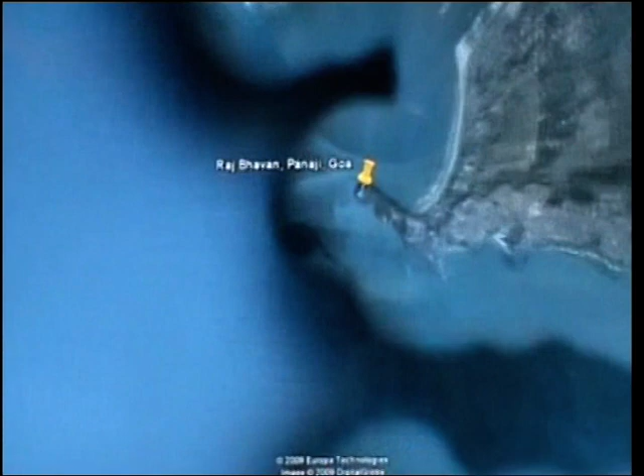Goa was the first part of India that was colonized by Europeans and also the last to be liberated. The Portuguese set up a base in Goa in their quest to control the spice trade. When India became independent in 1947, Goa remained under Portuguese control.

Under Indian rule, Goa has become an autonomous, federally administered territory. Goa was admitted to Indian statehood in 1987. The 400-year-old Portuguese time construction of Raj Bhavan Palace, the official residence of His Excellency, the Governor of Goa, is situated atop the Cabo Promontory at the confluence of rivers Mandovi and Zuari.

The northwestern and western slope of Cabo Hill, adjacent to the Raj Bhavan complex, has been experiencing a continuous process of settlement and distress for decades. As a result, cracks have developed on the pavements, the floor of the veranda, and intercepting the western and northwestern part of the building of the historic palace and Raj Bhavan.

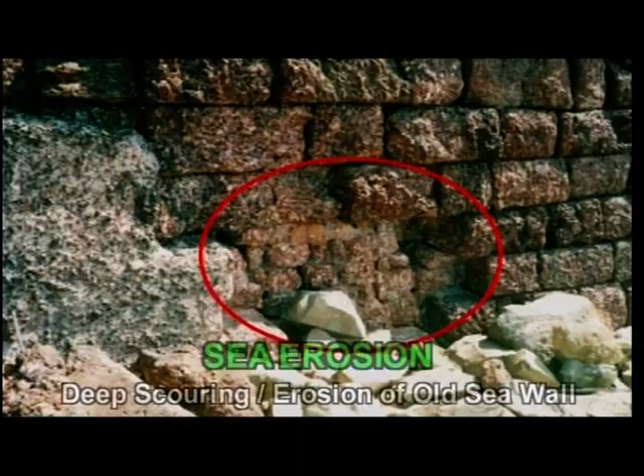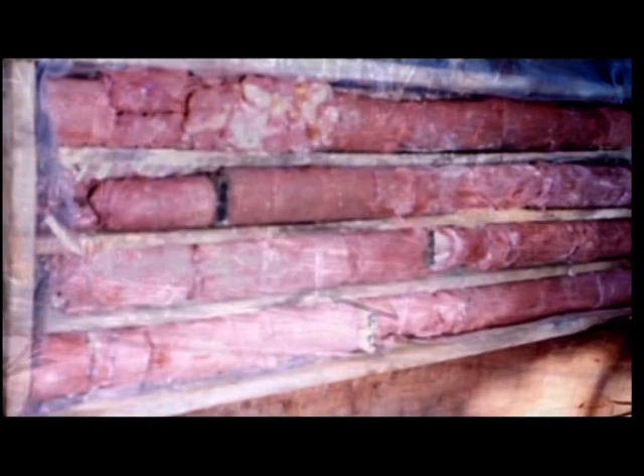The Water Resource Department of the Government of Goa had entrusted the work of analyzing the unstable slope at Cabo Raj Niwas to the Geological Survey of India. The Geological Survey of India along with the staff took up the work of investigation of the unstable hills in the year 2003 and conducted the investigation by drilling of bore wells, collecting the samples of the soil and also knowing the texture and type of slopes available at the site.

We are standing at the backdrop of the seat of His Excellency, the Governor of Goa, and this is about 100 meters away from the seashore, and it's about 40 meters above the sea level. Now this area has been under threat from the natural distress, the movement of the mass down below, and this is moving on towards the sea.

And this movement of the mass towards the sea has caused a number of manifestations on the ground, and see here, a number of cracks have developed, and these cracks have started from there and have entered into the building and far into the interior of the building.

So with this problem in hand, the Governor of Goa requested Geological Survey of India to take up this investigation. At their instance and also on the request of the WRD, Government of Goa, Geological Survey of India took the investigation in hand. Yes, this investigation was taken up in the month of June 2003, and Mr. Panduranga, Mr. Dharuman and myself, we were all involved in that.

This team of experts came over here, and first of all we mapped all those cracks and the surface manifestations which were existing and what you have seen on the ground. We could identify 3 active slide zones over here, zone number 1, zone number 2 and zone number 3, and where we are standing is zone number 1, where the most sliding is taking place, and very highly sensitive distress has taken place in this area.

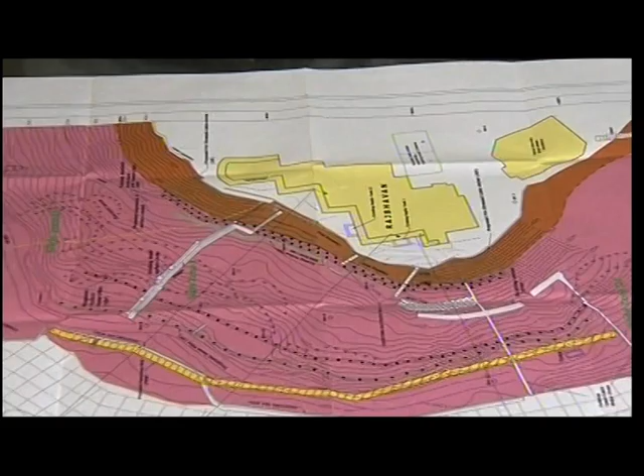Later on, after getting a good impression from the Governor of Goa, we took up our second phase of investigation, which was thoroughly a package of investigation. It is a full package. The package includes geotechnical mapping over here, and also the ground survey, which gives the contours and everything. That's the topo mapping.

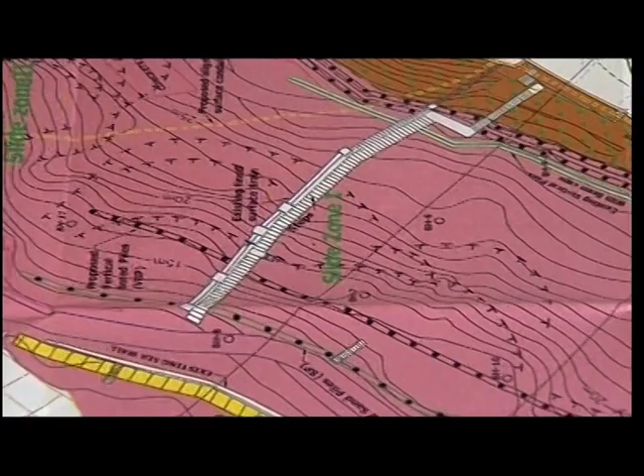Then geophysical surveying, geophysical mapping, just to know the bedrock profile and also the variations in the soil composition. Then subsurface drilling, just to know the different lithological changes beneath the surface, and also to know the groundwater level down below, and also to know the extent and configuration of the slip circle we have identified.

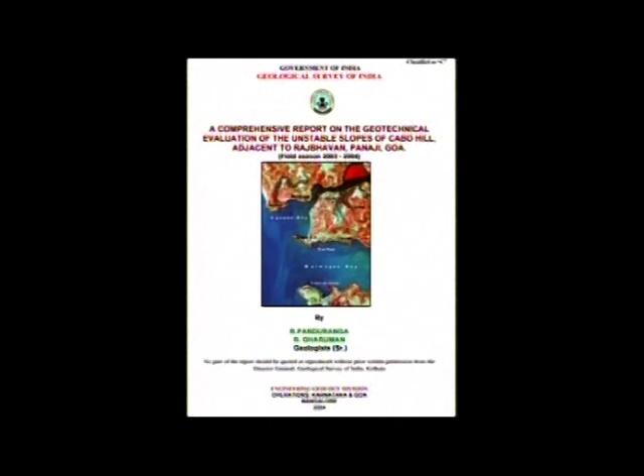Based on the recommendations of the GSI, the department has taken up the implementation of the work through ITD Cementation India Limited, who are the experts in such type of works. Total cost of the work was to the tune of 617 lakhs.

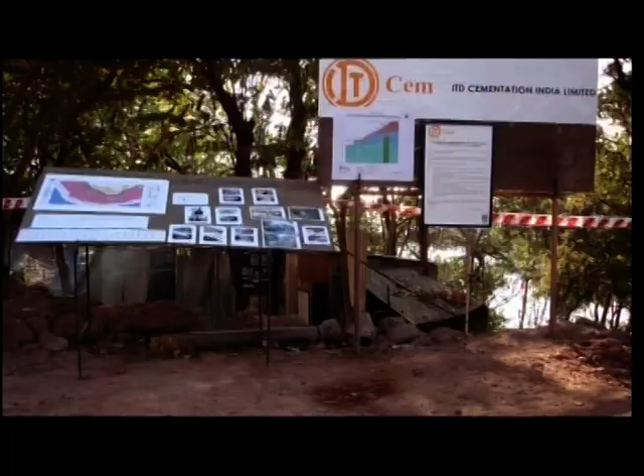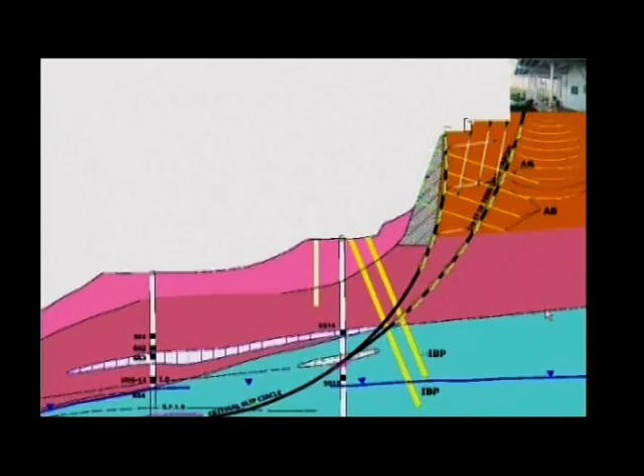Major components of the work are stabilization of the upper slope by pre-stressed cable anchors, which are anchored into the hard strata with a stress up to 25 to 30 tons, and the middle slope by providing vertical RCC piles with RCC cap for a length of 240 meters.

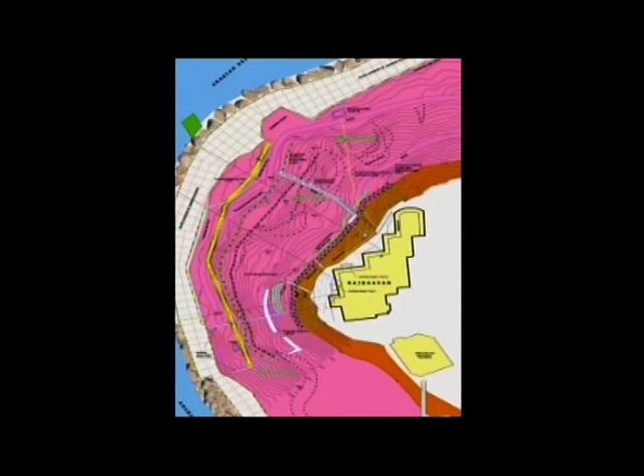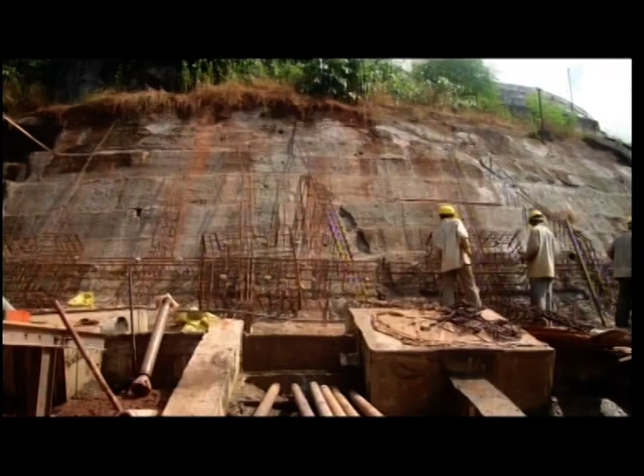The lower slopes are stabilized by providing concrete walls to intercept the slip circle. Also, the toe of the hill is protected by providing concrete blocks to avoid direct effect from the sea waves. The work was executed by the department under the guidance and supervision of the GSI Bangalore, who were all along associated with the implementation of this project.

Our second phase of investigation was a total teamwork between Geological Survey of India and the WRD engineers, and they were thoroughly associated with us. While drilling, our aim was not just to see the configuration of the soil, but also to know the different physico-mechanical or engineering properties of the soil. So for that, we did in situ testing over there.

That in situ testing includes the determination of the N values by SPT test, collection of the undisturbed samples, collection of the disturbed samples, and taking all these samples to the laboratory to get them properly analyzed, importantly to collect the C and phi values, moisture content, density factor, everything which is essentially required to work out the stability parameters of this distressed slope.

Based on the analysis of the whole data collected, they have recommended the remedial measures to be taken up in order to stabilize the slopes such that the cracks and collapses which were occurring regularly do not occur henceforth. The remedial measures suggested by the GSI could be divided into 4 parts.

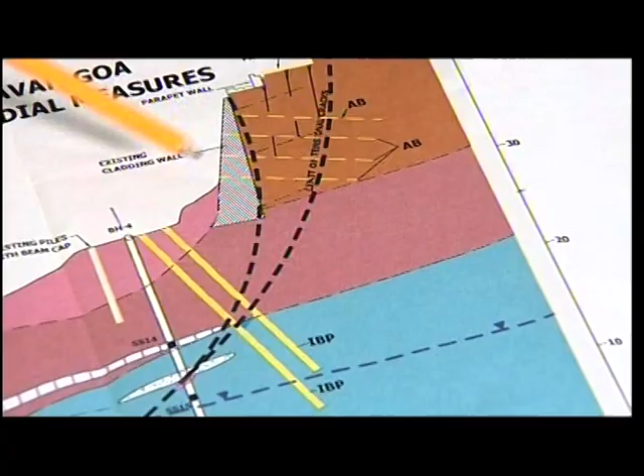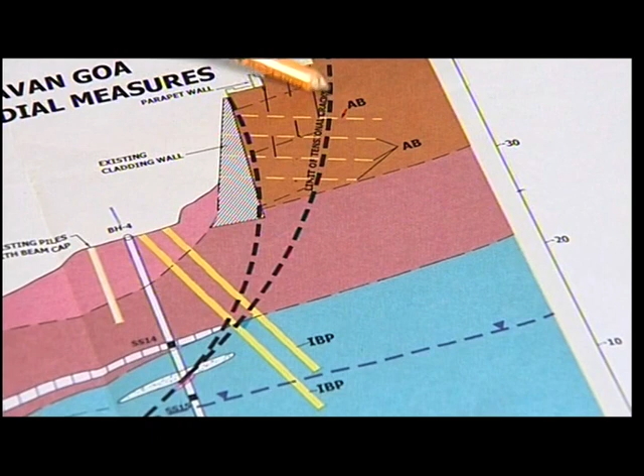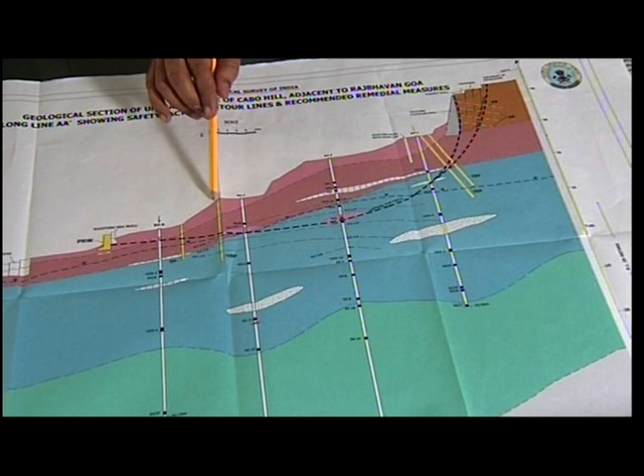This is the cladding wall which was there. These are the proposed anchor bores, this is the slip circle, and these are the inclined piles. From this point to this point is called the middle slope, and this is a slip circle. These are the factor of safety lines, 1.5 to 2.5, calculated on the mathematical model. And this is the vertical bore pile which has been put with a beam cap.

From this point to this point is called the lower part. This is the vertical bore pile which is there. This is the wall which is proposed to be constructed, which is well below the slip circle, and these are the sand piles which are proposed to be provided to relieve the pore pressures within this zone.

Further down, this is the sea, and these are the anchor blocks which are proposed to be provided to stop the erosion of the sea, such that the toe is also protected and all the materials are well within the slip circle. This is the toe part of the unstable slope of this Cabo Hill, and it's a crucial part where the slope forming material will be, and we suggested one retaining wall and a protection for the seashore.

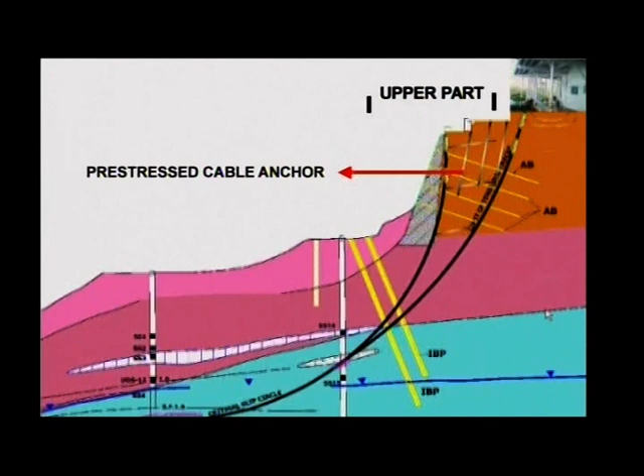In the upper slope area, they have suggested we should go in for grouting of the cladding wall and grouting of the disturbed zone to 4.5 meters, and also that a cable anchor should be drilled well into the hard surface available at the site at a depth of 17.2 to 22.5 meters. Based on these details, the department took up the detailed designing of the cable anchors, the piles and the pile caps.

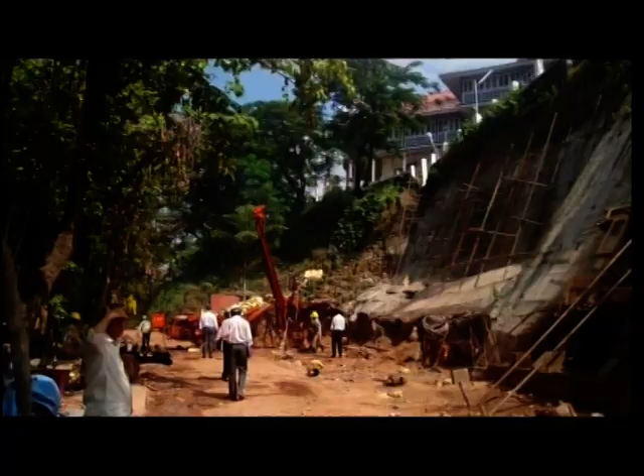First the department laid the base layer of the beam caps and then made a grid of columns and beams. The department did the designing and laying of the project and also worked out a method of how to tackle the situation, how to tackle the remedies so suggested.

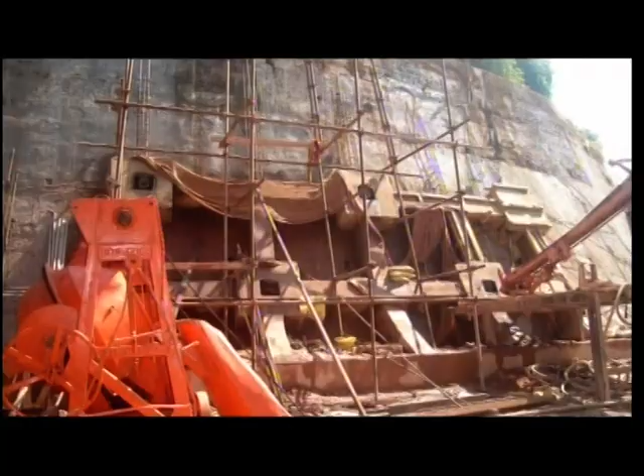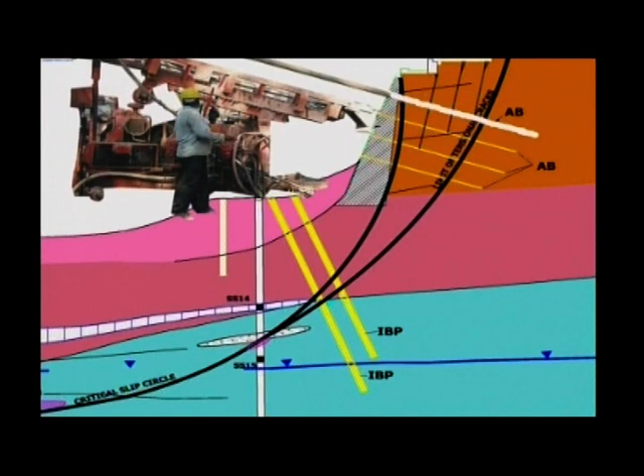First we proposed a grid of columns and beams at a spacing of 4 meters center to center to have four rows of cable anchors. Then we have 4 rows of cable anchors, one drilled at a depth of 22.5 meters, another at 20 meters, another at 17.5 meters and another at 15 meters deep into the duricrust.

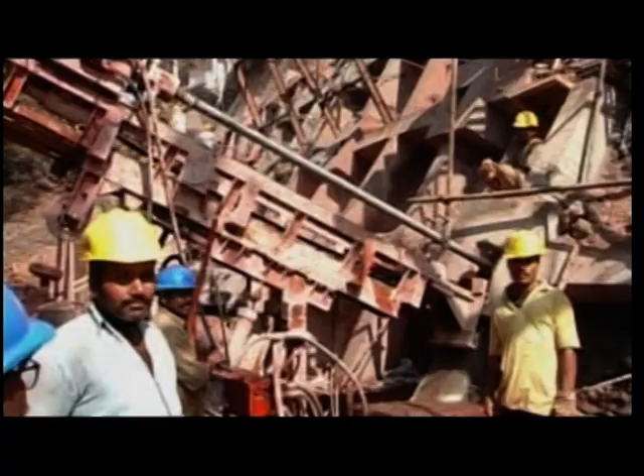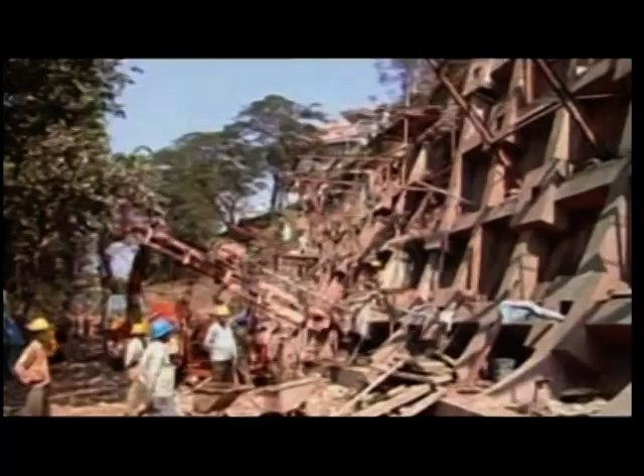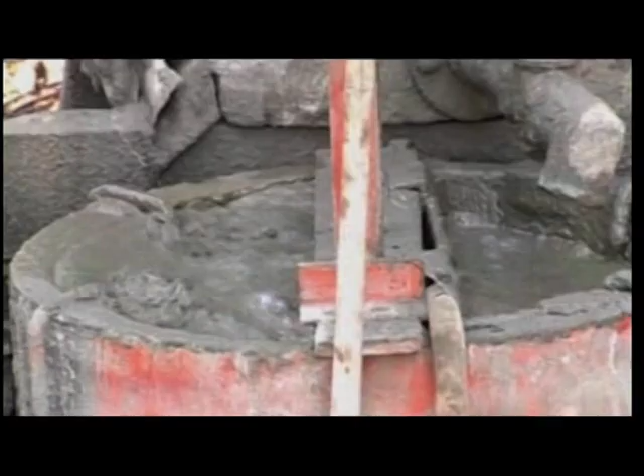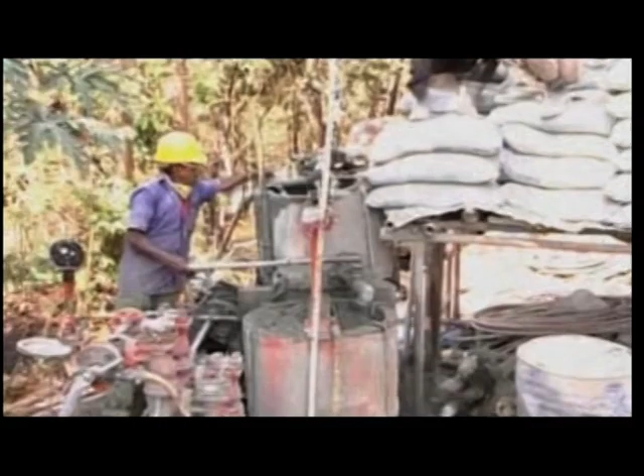ITD Cementation was awarded the work. They started the work. Initially we started grouting the cladding wall so that whatever fissures, gaps and cavities were there within the wall were consolidated, and also to have a proper joint between the concrete and the duricrust behind. Further, we did grouting up to 3 meters so that the disturbed soil due to distress over the years is consolidated and brought into proper shape, and also to improve the mechanical properties of the soil bearing.

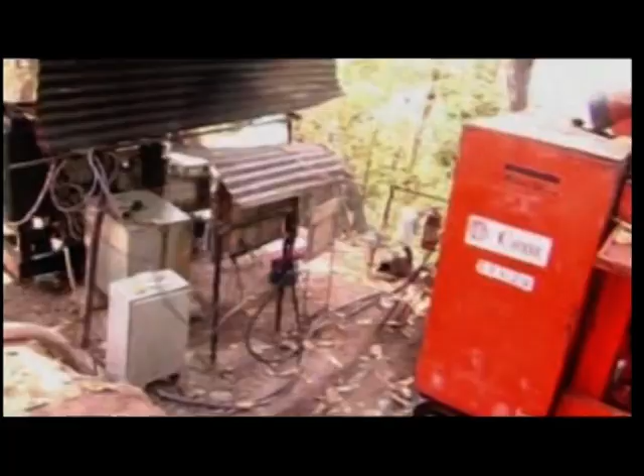And then we took a third grouting stage at 4.5 meters so that all the balance materials within the slip circle have been consolidated and the mechanical properties such as C and phi values are improved. After which we have taken core samples to find out how much depth the grout has travelled and what is the sample of the soil there, and analyzed it with the samples taken earlier before starting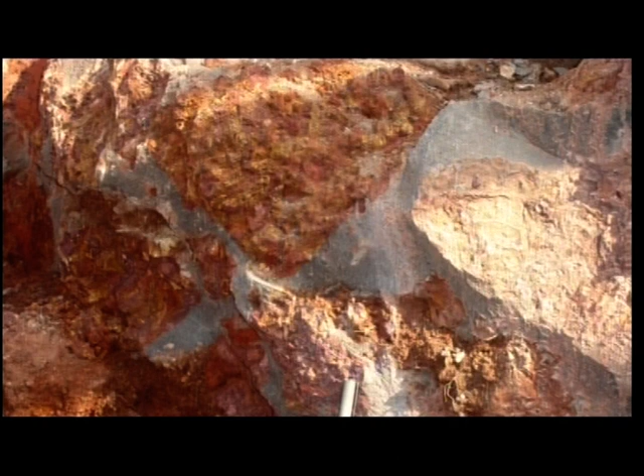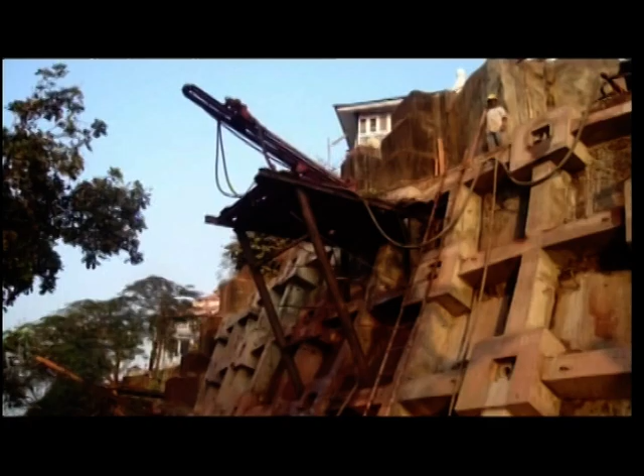the work. Once we confirmed that there is improvement of the mechanical properties of the soil, grouting was done at a pressure of 5 kg per centimeter square and the grout allowed to flow through and through the body of the duricrust until the point of refusal. Once we got the point of refusal, we leave the grout for 2-3 days, then again go for regrouting to see if any further grout is going in due to distress or drilling.

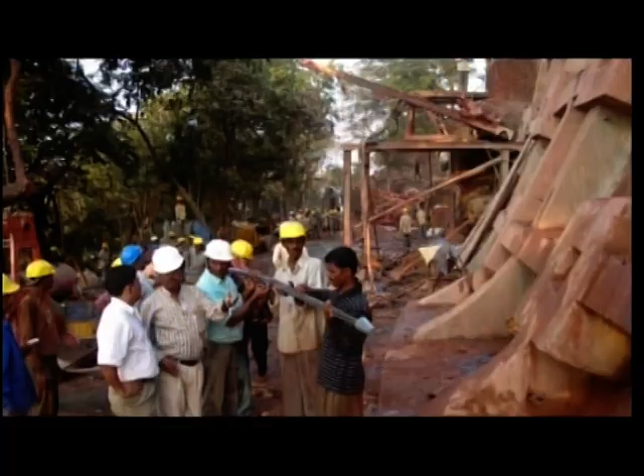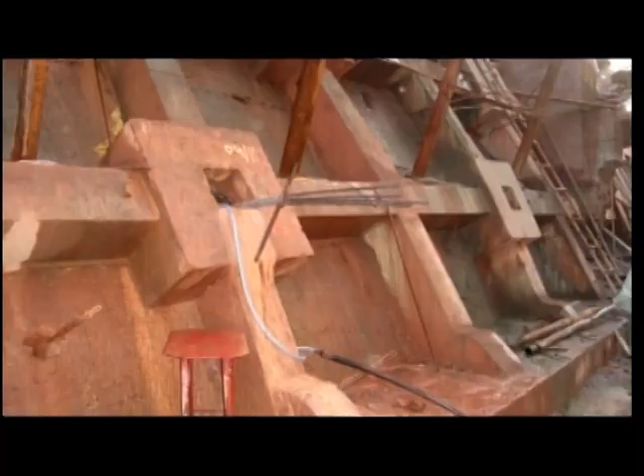Once it is confirmed, we go for a water tightness test, allowing the water to go under pressure and seeing the water loss. If the water loss is within the permissible limit of 5 Lugeons, then the bore is dried up and made ready for putting in the cable anchors. The cable anchors are prepared for lowering into the bore holes after the water test, and then the cable anchors are lowered, and the first 3 meters of the lower portion of the anchor is grouted and left for 28 days for the grout to gain strength.

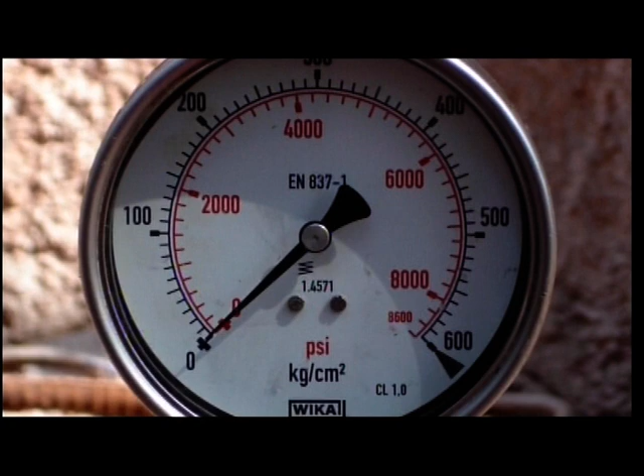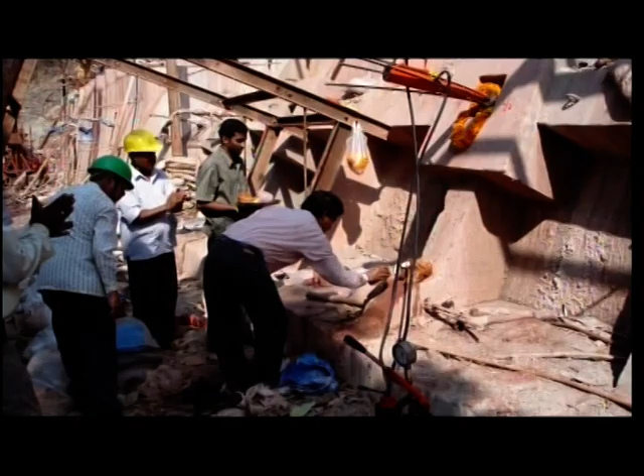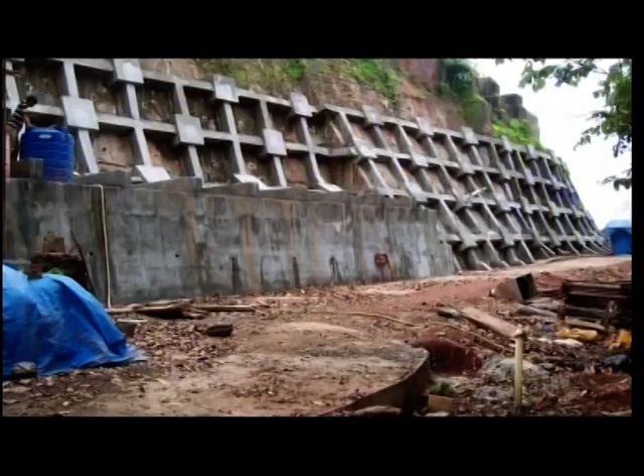After the required strength of the particular cable anchor has developed, the cable is slowly stressed to the design stress of 35 tons plus 10%, keeping a 10% stressing loss allowance. Then after stressing, the cable is locked over a stress plate and kept for 28 days to check the performance of the particular borehole. If there is a loss less than 10% of the stress put on the cable, then the cable is taken for final grouting.

During this process, we also keep several cable anchors ungrouted, called load cells, to check their performance over a period of a month or 2. This gives us the whole control over the methodology and the effectiveness of the grouting conducted. After doing all this process, now we are sure that the whole disturbed mass has been grouted properly and tied to the strong surface prepared a little away from the slip circle.

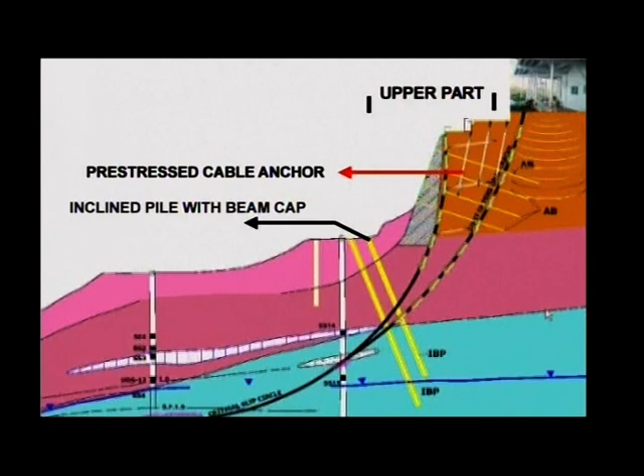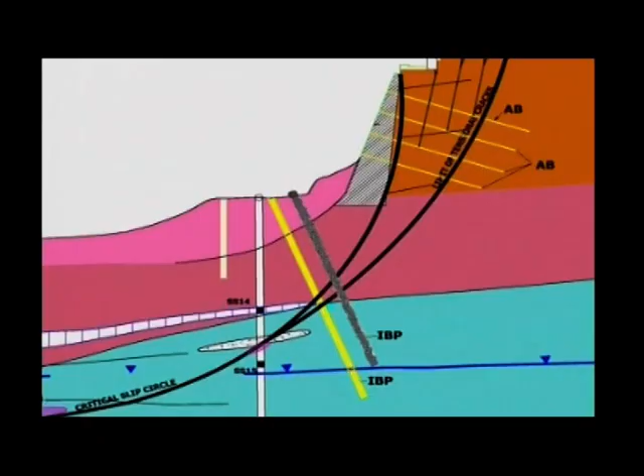With this, the upper slope was stabilized, and further down in the middle slope we have taken inclined piles of 15 degrees to the vertical all along the affected area to a depth of 20 meters. We have lowered MS pipes into the holes, then lowered a steel cage and then grouted those bores, which actually prop up the whole slipped or distressed area and also divide the slip circle into smaller segments such that the total mass slipping reduces.

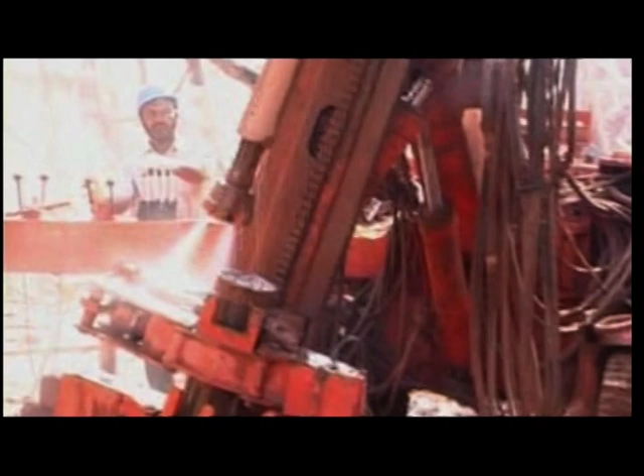And this is capped by an RCC beam, so that all the inclined anchors, which are at 2.5 meter center to center in a staggered way, act as one unit and have the strength to keep the whole mass intact.

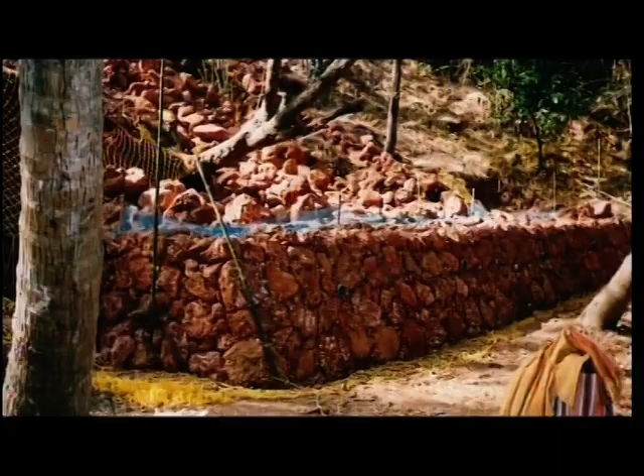That is called the treatment of the middle slope. This is the lower slope which is a little gradual, but at certain places steep slopes are there which are unsafe and which are moving with a small disturbance. These have been stabilized by providing laterite boulder pitching, and at some places we have given laterite boulder sausages so that we get a proper slope.

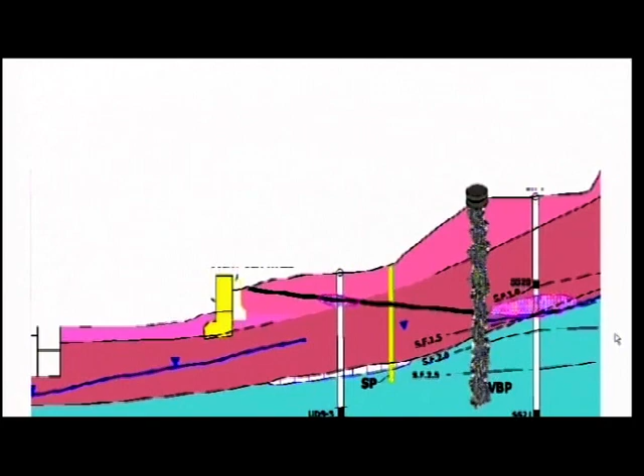And at the toe of the middle slope we have taken up a row of vertical bore piles which go below the slip circle in a row for a length of 240 meters at a spacing of 4 meters center to center, to a depth of 15 meters. These piles have been cased with MS pipe, and then in that we have lowered an RCC cage and then concreted it, and there is a beam cap which is given.

This also acts to stop the movement of the earth which is likely to come. Thereby the slip circle has been clearly cut into three phases: upper slope, middle slope and lower slope. That means because the continuity is cut, the movement of the slip circle is reduced and then it becomes more stable.

Thirdly, we have gone down to the lower reaches of the lower slopes of the Cabo Hill. In the lower slope of the Cabo Hill, we have gone for construction of a retaining wall which goes well below the slip circle and stops the movement of the soil due to the movement of water during the monsoons, thereby avoiding any movement of the soil whatsoever.

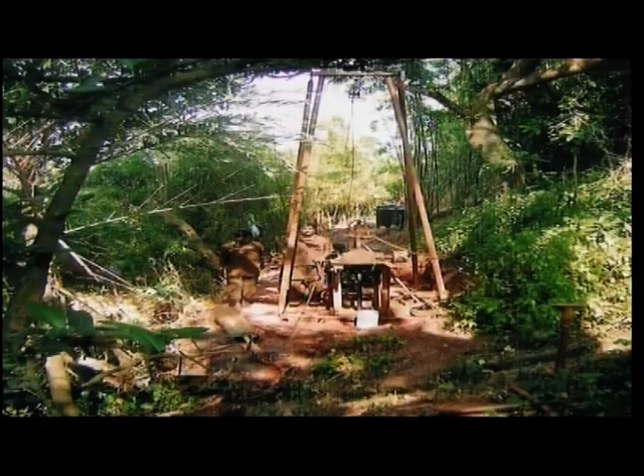This acts as a toe to the whole slip mass, which has been divided, as I said earlier, into three parts. Thereby the total movement which was acting in unison has been broken. Piece by piece it has been stabilized in the upper, the middle and the lower, thereby making the whole structure stable. Here we also took the precaution of giving sand piles at 4 meters center to center all through the length of 140 meters.

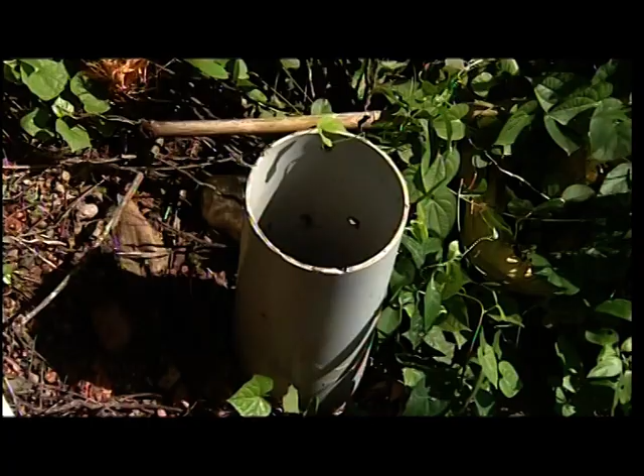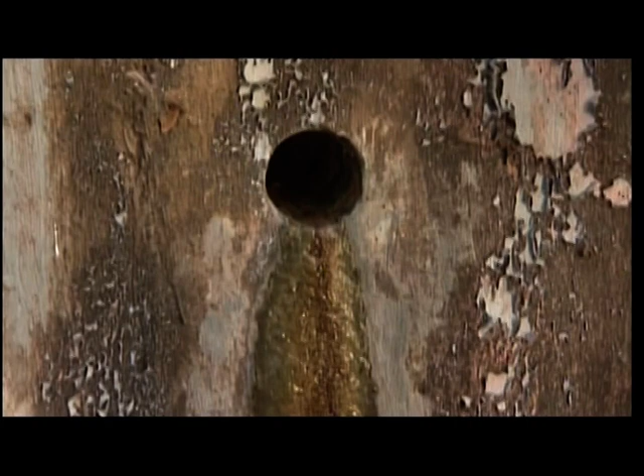Any hydrostatic pressure, any pore pressure which is developing and is unable to dissipate itself, will dissipate through this, so that no pore pressure is developed anywhere in the disturbed place. Care has also been taken to provide weep holes on the cladding wall, so that, because Goa faces heavy rains, whatever infiltration of rainwater takes place is allowed to flow out, thereby the movement of the fine earth, the clay or any other material within the disturbed place has been taken care of, making the hill stable.

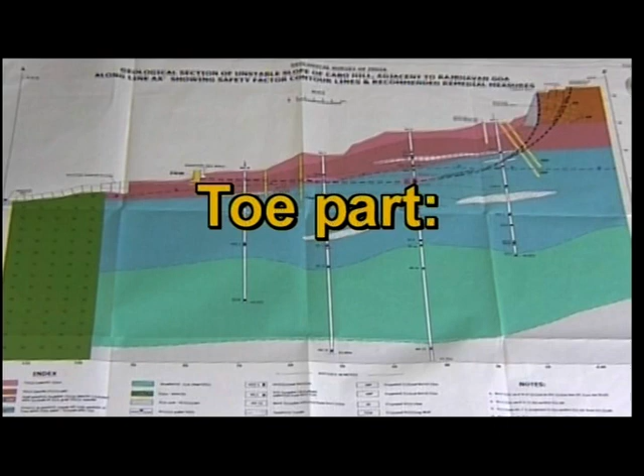Now we will go down to the seaward side. The toe of the hill has been bashed by the monsoon, bashed by the Arabian Sea, and very huge waves come and hit the toe during the monsoons, which causes erosion of the toe. That has been protected by providing armor blocks all through the length, ranging from 2 tons to 4 tons. These blocks cut the wave energy and reduce the erosion which is taking place at the toe of the slope.

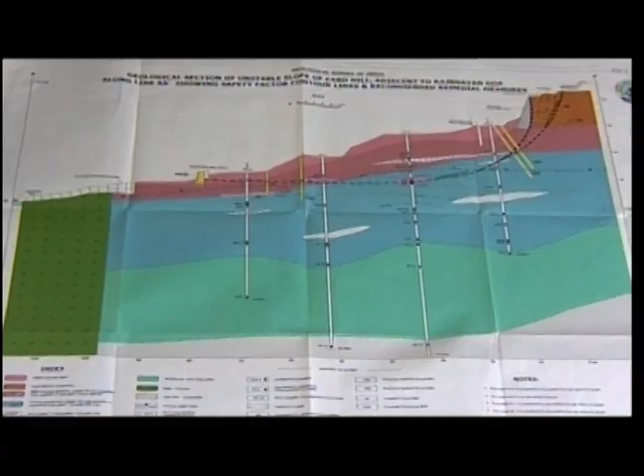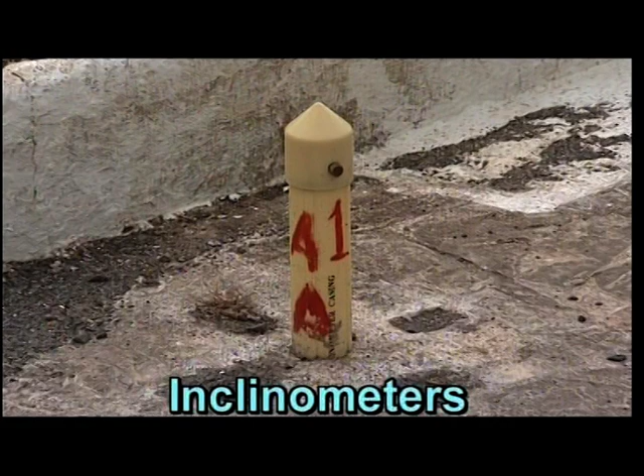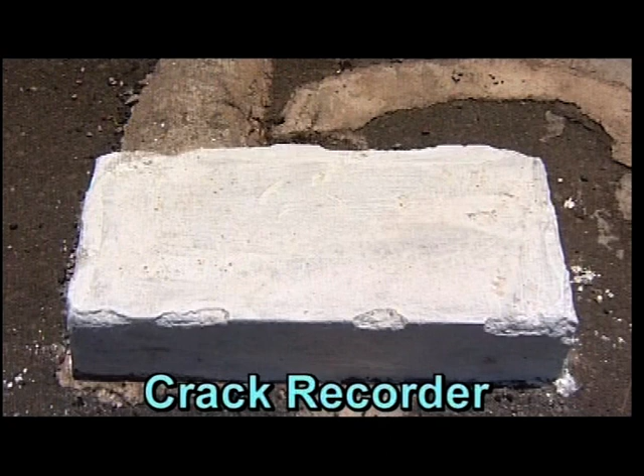After carrying out all this process, we have installed massive measuring devices in place. We have installed highly sensitive inclinometers on the face, in the bottom, in the center. We have put crack recorders in place which measure developing cracks to 0.01 mm. We have settlement gauges which show any settlement taking place, and inclinometers which have been drilled and kept at a depth of 25 meters. Any movement of the surface will be noticed by the officials.

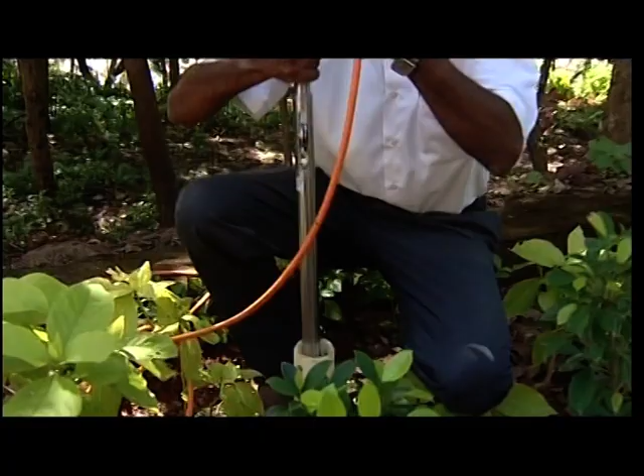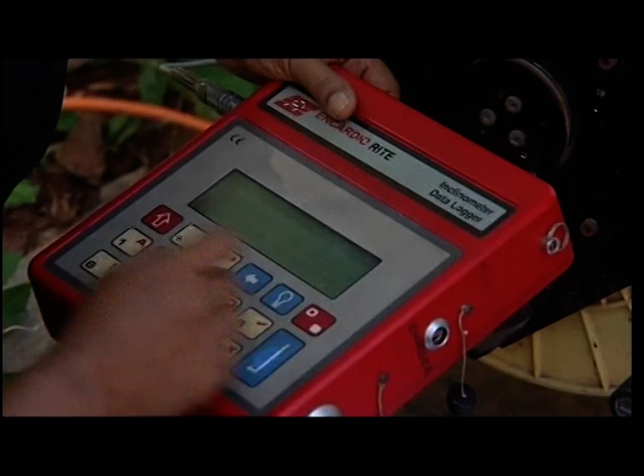This is the inclinometer location. We have 9 such inclinometers located at 3 different levels of the Raj Bhavan slopes. This comprises a specially made plastic tube in which a torpedo or probe is inserted for the full depth. It gives us the profile at every meter of this tube, the displacement in two dimensions, from which we can work out the deviation, the cumulative deviation also, and this can be used for analysis.

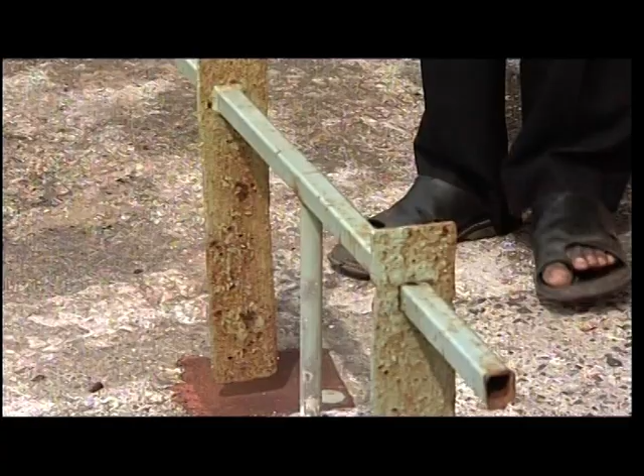The data from the probe is then connected to a data logger, which can then be processed using a computer to give us the results. This is a settlement gauge location. We have 9 such settlement gauges situated at 3 different levels on the Raj Bhavan slopes. This gauge is lowered to a depth of 20 to 25 meters, and it helps us measure the vertical displacement of the land mass below this level.

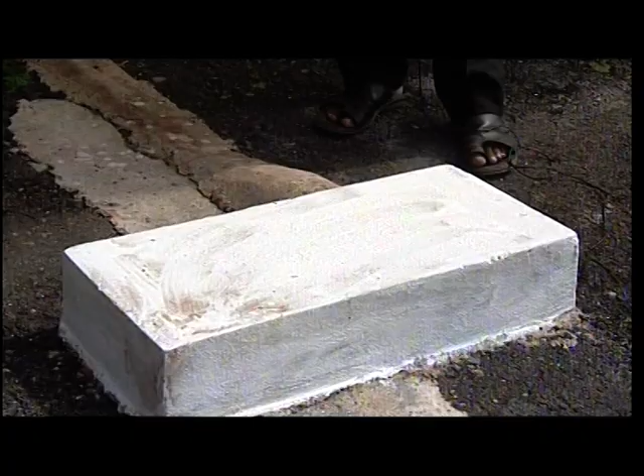Right now I am standing on the pavement of Raj Bhavan, and at this place there are a lot of surface cracks visible. To measure the behavior of these surface cracks, we have inserted one crack meter right across the crack, and this meter is then embedded in concrete.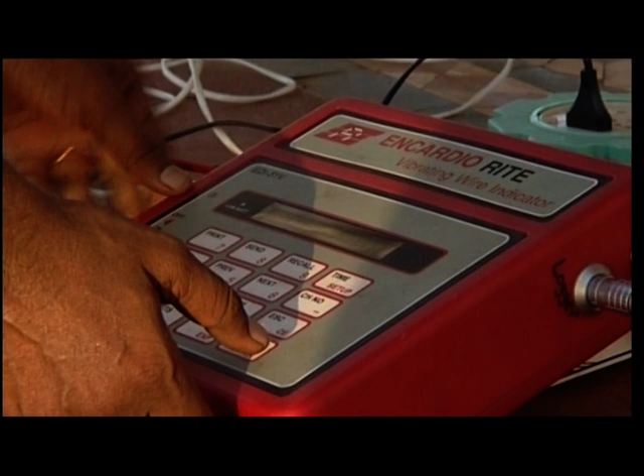The cable from the crack recorder is then connected to a vibrating wire indicator or the monitor, which instantly shows the reading in mm or any units, indicating the relative displacement of cracks on that day, and this can be compared to the previous readings, and we can find the displacement if any. So this is how it works.

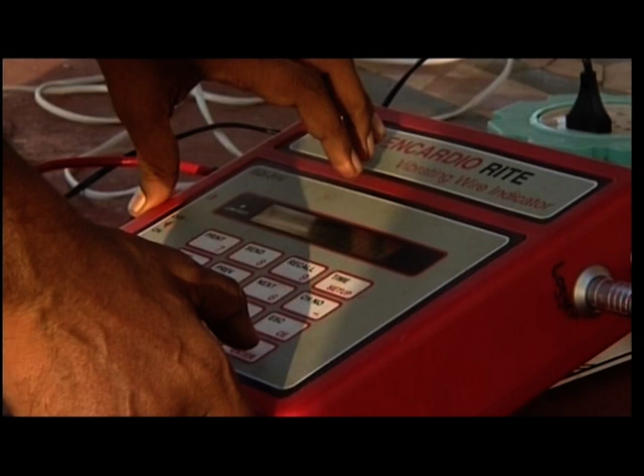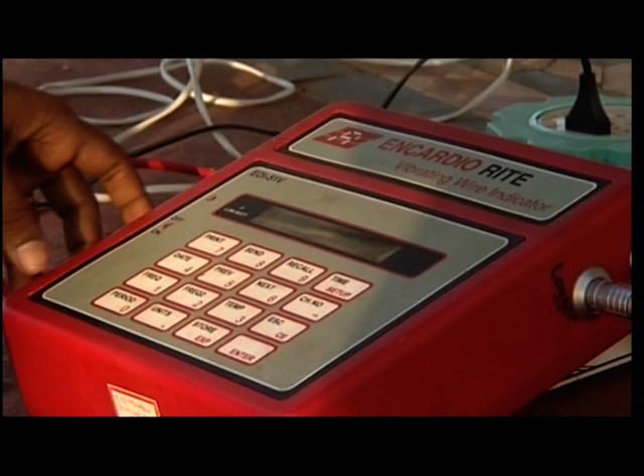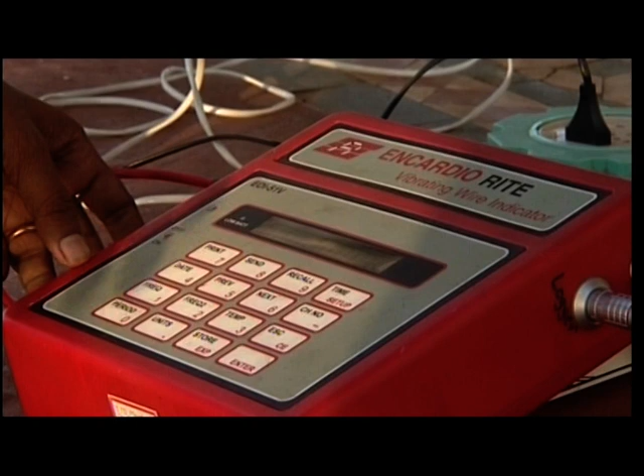This is very easy to handle, and any layman can also use this instrument. The moment you press it on, you get the date. Then again you have to press enter. You get the time when you are taking the reading. Then you have to feed in the channel number. Altogether we have six such locations on top of the Raj Bhavan pavement. Here this channel number is 3.

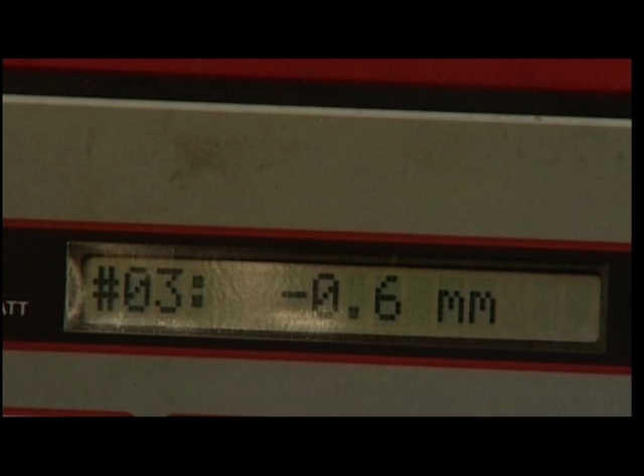I have to feed the channel number and press enter, and instantly I get the reading in mm. The reading can be seen. This data can then be recorded manually, and the same can also be stored in a computer for further use.

This project has been completed for the last 1.5 years, and it has been giving wonderful results, because earlier we were having cracks and whole slopes used to move, but presently we have seen that there has been stabilization in the area, and whatever measures have been envisaged, I think they are quite successful. We have tackled about 120 meters of the length, and we have to tackle another 80 meters more.

So presently I am very much satisfied with the measures that have been taken, and I think we will go a long way in adopting such innovative techniques. So all I can say right now is that it was a very professional execution of the whole stabilization job, which was taken up by WRD and GSI.

And as on date, we have not seen any fresh cracks appearing, and even the cracks which are existing are not widening. In fact, twice we opened up the cracks to check the quality of the work that was done. And I'm happy to state that as of now, I feel that the intent behind this whole work has been fulfilled, and we were able to achieve stabilization of this structure.